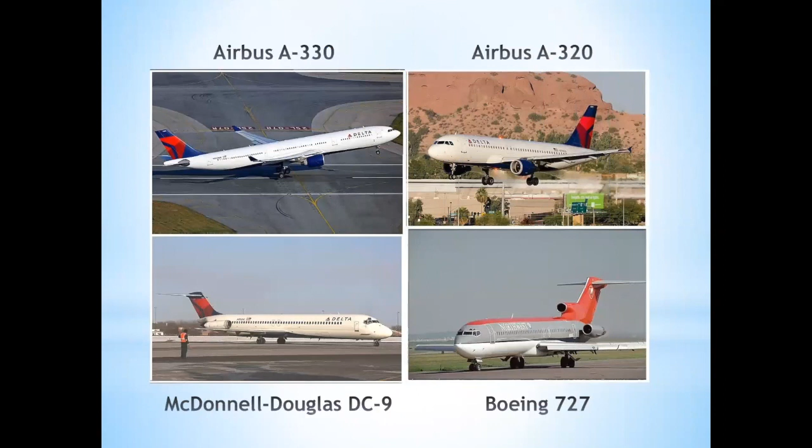And by the way, just a little bit more on my background, I also do practice law. And so I guess between being an airline pilot, a New Yorker, and an attorney, I have something anybody could hate, right?

These are some of the other airplanes I flew when I was over there. I did teach on the DC-9 - I was a line check airman and instructor on that airplane. I did fly the Airbuses, the baby buses we call the A320, and then the A330 as well, mostly over the ponds with that. And then you could see the bowling shoe paint job on the 727 when it was still Northwest Airlines.

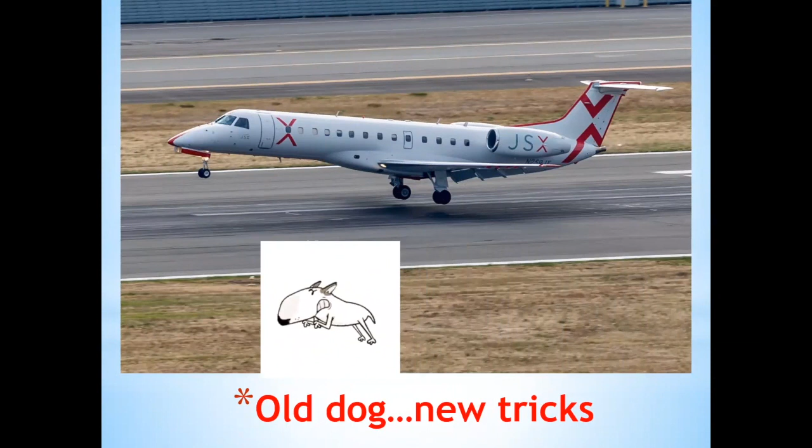Anyway, I really didn't want to give up commercial flying, as Mike mentioned. So I'm flying for what's called a scheduled, it's an air carrier scheduled charter. I thought I was done with my type ratings, but this was my 6th type rating, on this Embraer, which I'm flying now for JSX. You can see it's a pretty decent glass cockpit - not the latest technology, but it's a glass cockpit. It's a nice airplane to fly, kind of has a heavy feel like a bigger airplane, so it's kind of fun flying it. That's what I'm doing now.

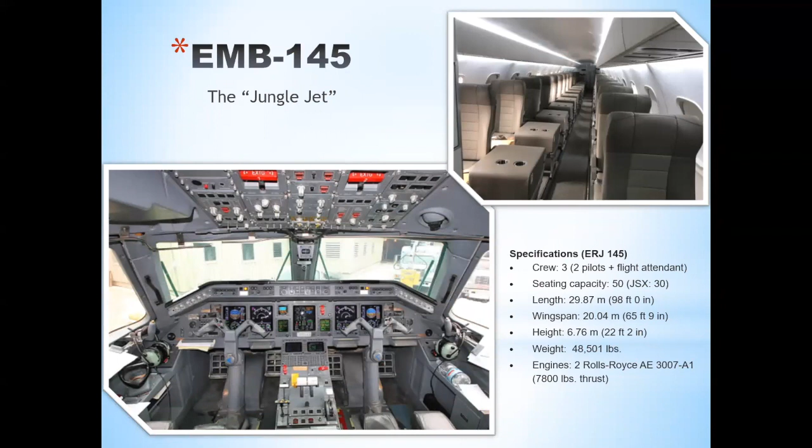People say there's a saying - I speak a little Mandarin - and people say that the symbol for change is both danger and opportunity in Chinese. That's actually not exactly accurate. Weiji is actually the pronunciation for it. Although that's not exactly accurate, I think the statement is accurate, that whenever there's a change, there's both a danger, but there's also an opportunity there, right?

So in our case, the opportunity with a glass cockpit is you have a lower workload, you have less fatigue, you have more economy of movement, you have new and enhanced approaches that you could do, like LPV approaches, that sort of thing, much more information. But on the other hand, you have to learn a new way to fly, a new way to scan your instruments, a new way to do those approaches, right? And you have to be careful about complacency, because along with a glass cockpit comes automation, and we'll talk a little bit about that later.

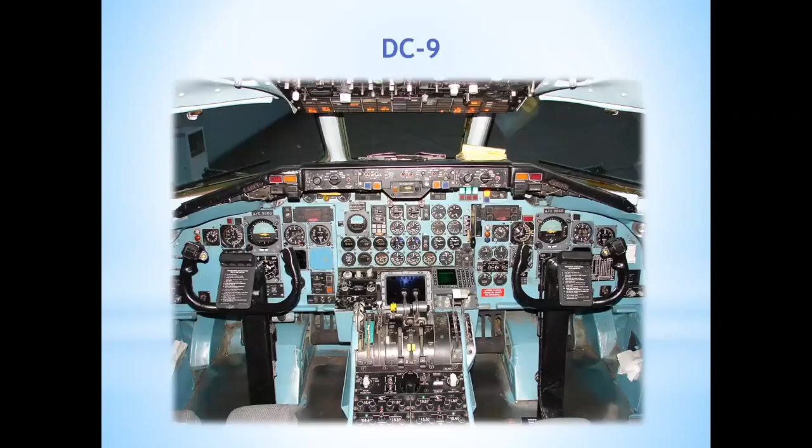Well, when I did my transition from analog to glass, this is what I was flying. My first analog to glass, I was flying the DC-9, which was the most archaic airliner at the time. And I ended up getting a bid to go to the Airbus A320, which was the most advanced aircraft of the time. Now you look at these two airplanes - flying this is very different than flying this, okay?

It was quite a transition, and I knew it would be, so I studied really, really hard to learn this before I ever got to class. Because I knew this was my first one and it really was all new to me, so I really wanted to learn it. It's a wonderful airplane, but it's very different. It doesn't fly like this flies, right?

Here's what you have to realize: you go through a learning curve when you transition from analog to glass. Let's face it, most airplanes we fly are transitioning from analog to glass. It used to be that airlines had much more advanced avionics than GA airplanes, but that's no longer true—you can buy really nice stuff for GA airplanes these days, and in many cases it's better than what the airlines are flying. But you do go through this learning curve. First you think, oh yeah, glass looks great. Then you realize, yikes, this isn't easy, I don't really know what I'm doing. Then you think you start to get it, but you realize what you don't know, so you think, yikes, I've got a lot more to learn. Then it starts to make sense, and finally, like anything, you master it and it's wonderful. It does take that learning curve to go through.

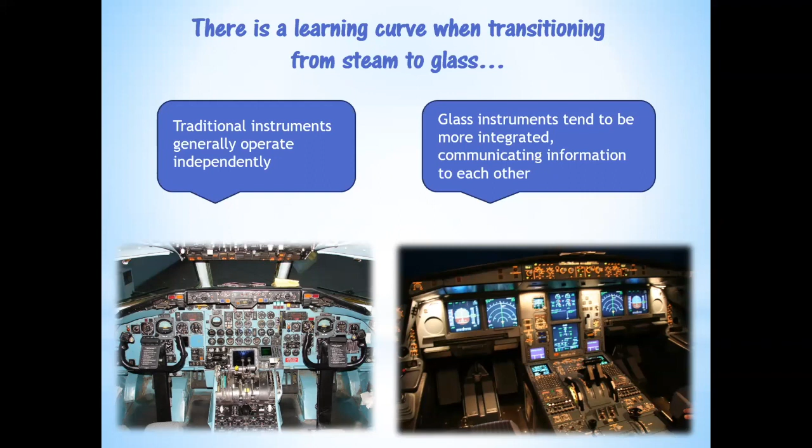One thing to realize when transitioning from steam—as we call traditional instruments—to glass, is that traditional instruments tend to operate autonomously. Each one does its own independent thing, and you look at it and get the information from it, and that's it. But in a glass airplane, the components all tend to be looking at each other and getting information from each other. So there's a lot more interaction between the components and systems than on a traditional airplane. You have to get that concept down.

Let's say one of these is your airplane. And then you go and get glass. Is it the same airplane to fly? When you walk up to it from the outside, it's the same airplane, right? But is it really the same airplane to fly anymore? I submit to you that it's not. Let's say this was your cockpit, and somebody was wonderful enough while you were sleeping to sneak out to the airport and plop $120,000 down and overnight manage to get your cockpit to transition to this. Then you come up to your airplane and think, yikes, somebody messed with my airplane. Would you be able to just hop in and fly away the same way you did the day before? Obviously the answer is no. There's something to learn now.

So that's what we're going to talk about.

Two questions airline pilots always ask when flying glass airplanes: one is, why are these fingerprints on the glass? It amazes me—I get into the 737 and there are fingerprints all over the screens. These are not touch screens, there's no reason to touch these, but for some reason there's fingerprints. I'm always taking off, you know. If I wanted to look at fingerprints, I would have joined the FBI.

But anyway, the next thing they're always asking is, what's it doing now? Everybody goes through that transition when they go to glass—like, what's this airplane doing now? It's kind of doing its own thing. So today, hopefully, we're going to look at ways to avoid that 'what's it doing now' feeling.

With the traditional six-pack, you always want to treat your attitude indicator as the hub—no matter what else you do, the next thing you do is look at your attitude indicator. When you do that, you never get that far out of whack. You're used to looking at the other instruments and comparing them to your attitude to get what you want out of them. The same thing applies with glass—you still need to use the attitude indicator as your primary hub when looking at the other instruments. But there's a bit of a difference when you look at an airspeed indicator versus the round dials, as we call them.

You're sort of used to seeing that needle in a given place. Well, that doesn't happen now with the digital instrument. It's more of a tape, chances are. And so you're now looking at a numerical value, not a place where that needle is necessarily, right?

Okay, same thing with the altitude, right? If you're flying IFR, pretty much those needles are pointing up. If you're flying VFR, one of them's pointing up and one of them's pointing down. So it's kind of a visual thing you could look at. But in the glass airplane, it's a numerical value. It's digital.

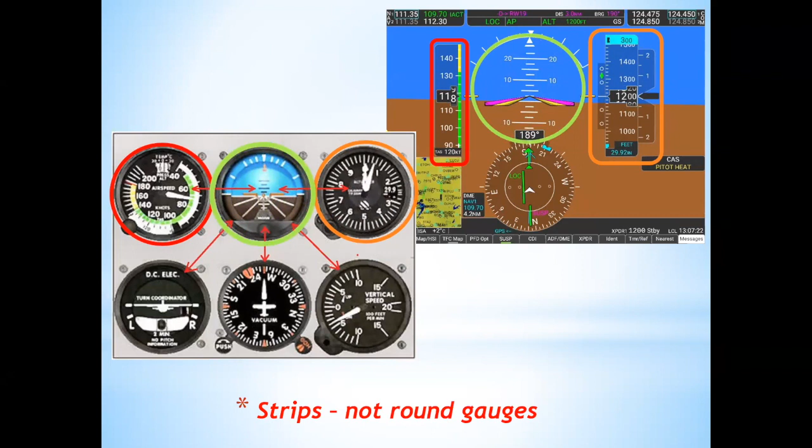And the same thing now with your attitude, you do still look at it in a traditional way, but sometimes you have even more of a horizon to look at, and that's kind of a big help. So you do still have that kind of information to look at.

I'm going to be going through some things quickly and then later on something slowly, because I want to emphasize those. But again, we're looking at digital versus analog, and you're looking at how your scan tends to change. And it takes a few months to get used to that.

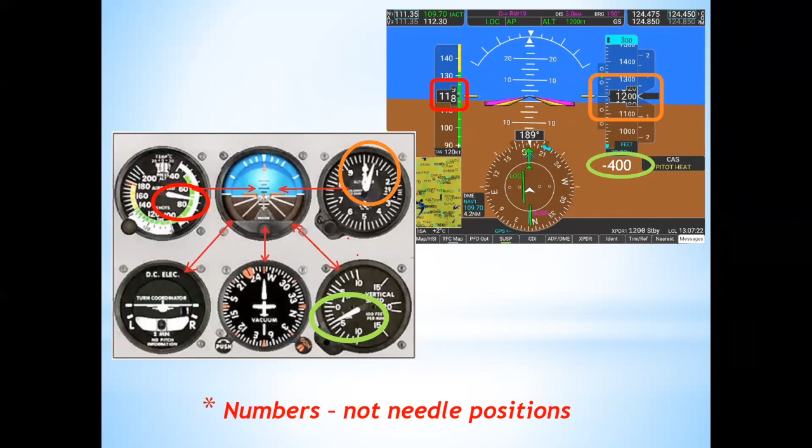Look at this, especially a vertical speed indicator. You're used to that needle up or down, meaning I'm going up or I'm going down. Whereas now I'm looking at a negative 400 to see that 400 foot per minute descent. So it's a different way to look at it.

I met a guy who got a Garmin and he said, hey, this is great because being that it's a screen, you could program it for round dials if you want to. So if you want to keep it traditional instruments, you can do that. But I'll say this: you could put off-road tires on a Ferrari, but should you? So I would suggest that if you're going to the new modern instruments, go to the new modern instruments.

Yes, it'll take you a little bit of a transition, but enjoy the new experience of it. And in the long run, I think you're better off looking at the new digital instruments the way they're meant to be. But the other side of that coin is, it's information overload in a lot of cases.

I notice a lot of pilots when they go to glass, boy, there's so much there. What do you look at, right? And it's interesting how as you get more comfortable with looking at the glass, your mind filters out what you don't really need at the moment.

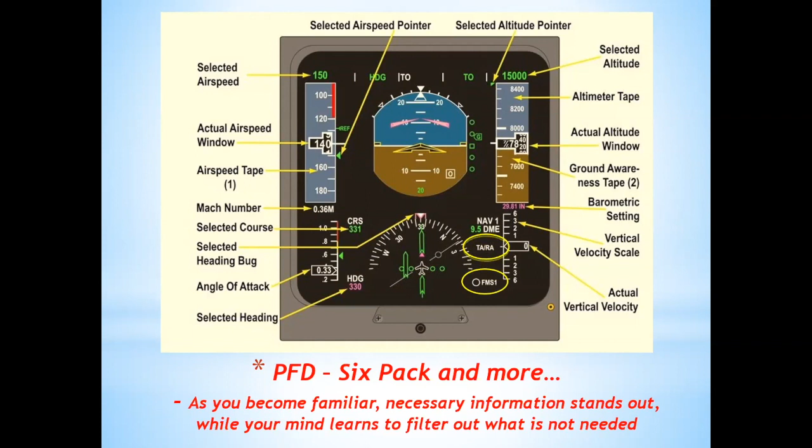So for instance, if you're not really using your flight management system at the moment, you sort of filter it out. If you don't have traffic that's a factor at this moment, your traffic advisories and resolution advisories, which you may have or may not have, are not necessarily something you need to look at. So you learn to sort of filter things out as you need them.

Another thing that's a little bit of an oddity, we're used to stepping on the ball for coordinated flight. And with a digital instrument, they may have this little guy up here. Sometimes they say you sort of put the sail over the sailboat, or you sort of step on the brick, so you're using that to make that coordinated flight instead of a ball sometimes. It depends on the symbology.

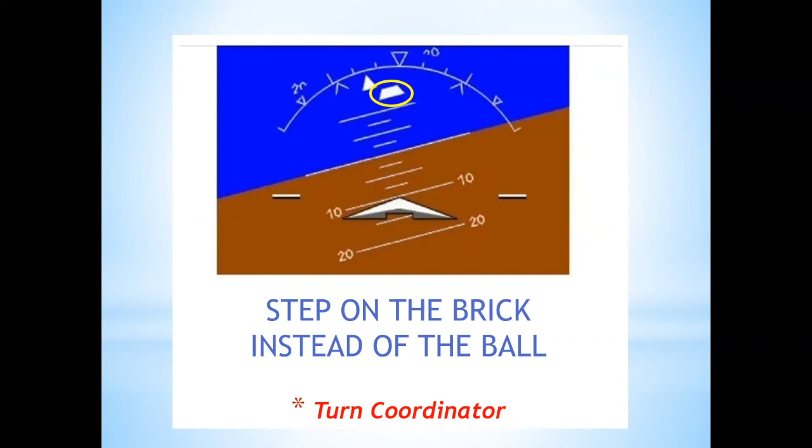I have to say that sometimes I find this a little bit subtle, a little bit tougher to look at. You get used to it, but it is a little bit more subtle. This is what I have in my airplane, and you could see it's digitally produced, but nevertheless it's a little ball at the bottom, kind of like you're used to looking at. So in this case, it's a bit more of a traditional view of your turn coordinator.

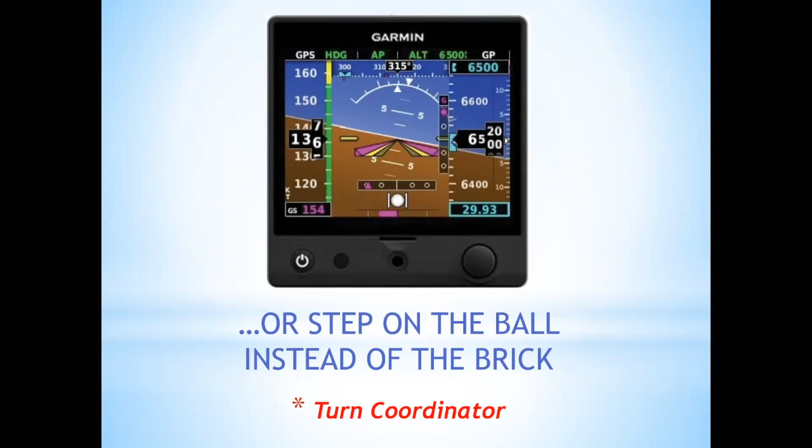Right, so that's good information to have, right? Okay, and then of course we obviously have our maps and things like that, or our charts, I should say, and that's kind of a bird's eye view. But I'm not going to get heavy into that because we already are looking at those things a lot.

Many of us already have GPSs. Even if you don't, if you look at a chart, you're basically looking at a paper version of a bird's eye view. So that's not what I'm really going to be talking about today as much as I am about the symbology and how to use the glass to navigate, that sort of thing. But we do have the benefits, of course, of that sort of technology, and it's wonderful. Right? Follow that magenta line, right? And it's really a very nice way to fly.

I just came back from Santa Maria a couple of days ago, Solvang. Mike Jesh referred to that earlier in talking about interesting places to fly. And that is a great place to fly. So it was really good. But I followed that magenta line. I was able to get direct, do that sort of thing. So it's got a lot of nice features, obviously. But that's not what we're focusing on today.

Very important, and you'll see later on how that could be critical.

Instrument setup. Now, we talked about the color of these needles. What's wrong with this picture? If you look, there's your green localizer needles, meaning you're getting information from the good green earth coming up. But what's happening on your GPS? You're tracking a GPS signal, magenta, and they don't match. You see that? So why would something like this happen?

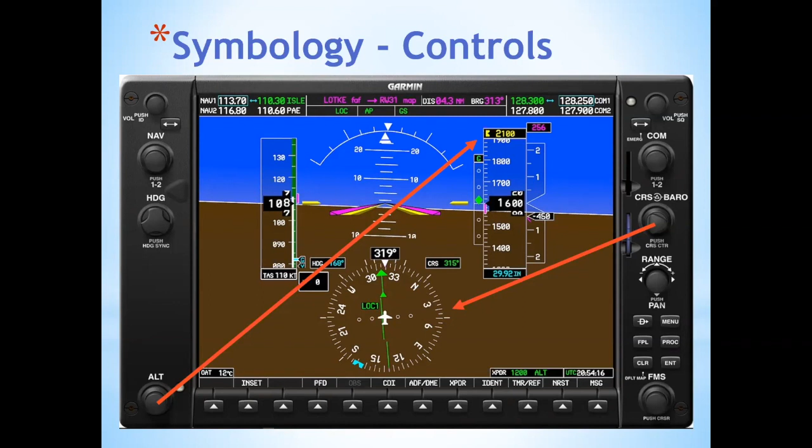This is part of your pre-flight setup. When you do your pre-flight, check your flight controls, and get into your avionics, this is part of your setup. This is now a G1000. I mention this because whatever you get used to becomes the norm, but it seems to me sort of an illogical setup. Here you have your altitude knob on the lower left. Where is altitude normally seen? On the upper right. Seems to me the knob should be up there, but that's not where it is on a G1000. And we have a lot of our lateral information off on the left side, but where's our course indicator or course knob? It's on the right. So it just seems like they were kind of illogically set up.

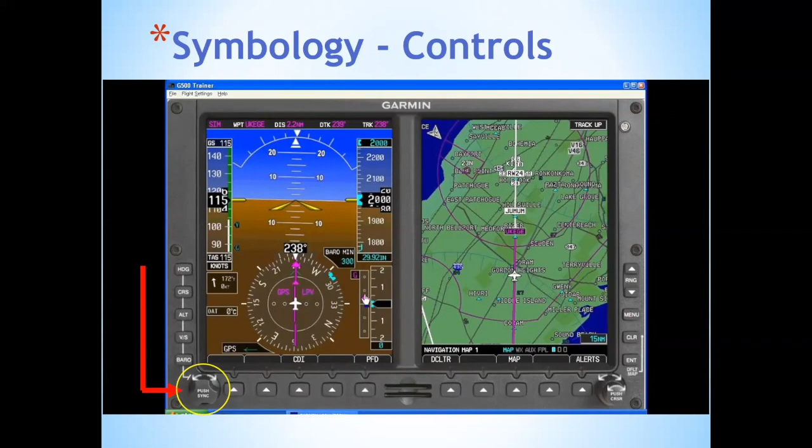I kind of like the G500 now because what that has is a knob at the bottom, and you look at the things above it: heading, course, altitude, vertical speed, baro. They all have a line going to it. So basically, whatever button you press means that knob affects that particular thing. Very logical, so I kind of like that a lot. But the reality is, whatever you get used to using becomes the norm to you. Still, I find this to be a little bit more of a logical setup.

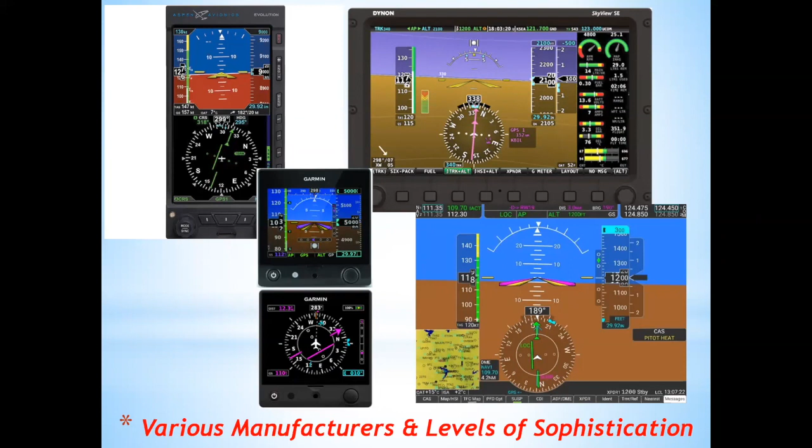Again, you have to get familiar with your particular manufacturer. There's Dynon, there's Aspen, there's Garmin, right? There's all kinds of different avionics that you need to get used to the symbology. I like to, when I'm just kind of vegging out watching TV, pick up the book again and review things. And invariably there's some little things - oh yeah, that's right, forgot about that little nuance. So it's good to do that.

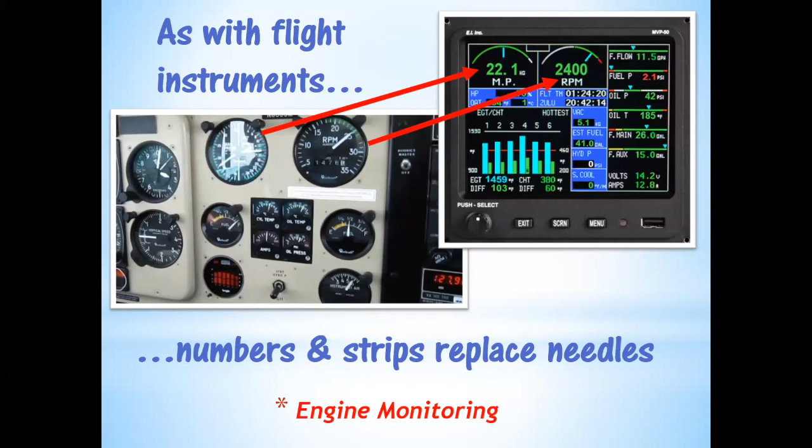Now, keep in mind also that you could get digital engine instruments. So you could have the traditional analog instruments, but if you go to a digital readout, that changes things too, because you're used to these needles in a given place. You do have these simulated needles on this one as well, but you're more looking at a digital readout. So it's a different type of scan that you have to get used to. But again, once you get used to it, it's quite nice and superior to this - it really gives you detailed information. And of course you can modify a lot of these screens to really make them the way you want them to be. But keep in mind, you do have that to deal with as a new way to look at your engine instruments.

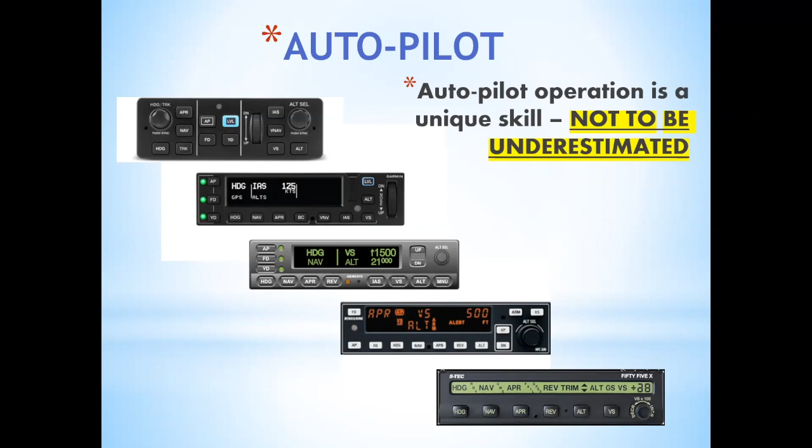I'm going to be getting kind of heavily into this part, which is why I did the first part a little fast. But one thing you really need to get used to is your autopilot. I once had somebody say to me, yeah, you airline pilots, you just click it on, push a button and watch the airplane fly. Oh really? So I guess that means you can do what I do, right? You could just go in that airplane, press the button and watch it fly. Well, no, I guess maybe there's a little more to it. And there is, because if you don't know how to use your autopilot - and that's a skill of its own - that's a 'what's it doing now' thing, because the autopilot may be doing something you don't want the airplane to do. You really need to understand how your autopilot works. That's a critical thing, and there are some definitely nasty things that could happen if you don't understand that.

Keep in mind, don't forget, when all else fails, shut off the stuff and fly the airplane. You all know how to fly stick and rudder, so when it comes down to it, if it's not doing what you want it to do, you could always shut it off and fly it. Remember, the autopilot - what it indicates - is rumor, and what's on your flight mode annunciator is fact. That's a way to keep you out of trouble, understanding what the airplane understands itself to be, what it's going to be doing.

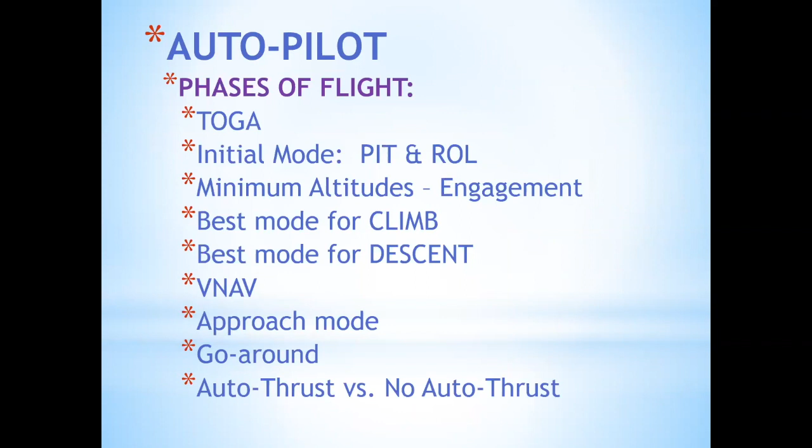All right, so let's talk a little bit about the different phases of flight using that automation and the glass cockpit. Initially there's the takeoff go-around, that's the TOGA button. You'd hit that and your flight directors would zip up to your normal rotation attitude. But it varies with the autopilot, generally speaking an autopilot is likely to default to the roll mode and the pitch mode, because it doesn't know what you want yet.

So the roll mode in a takeoff is normally going to be wings level. The pitch mode is going to be what it expects you to rotate to for a normal takeoff. In my airplane, at least my GA airplane, that's about 10 degrees. So that flight director comes up to 10 and expects you to bring your wings up and tuck them nicely into that flight director. That's the mode the autopilot's initially going to be in.

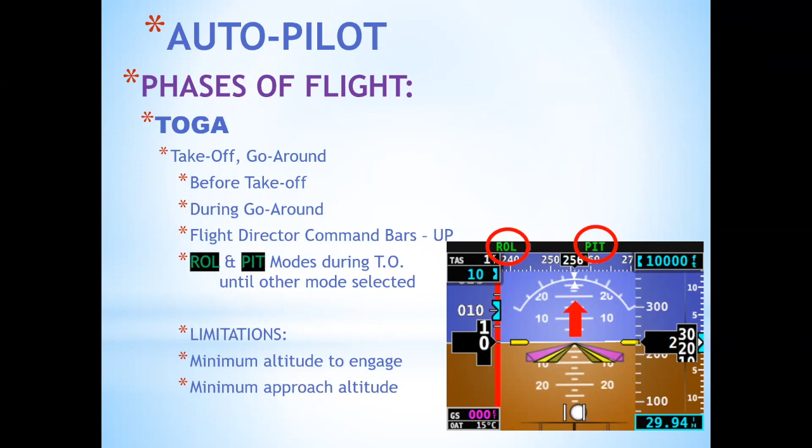But chances are you're going to be going on a heading, possibly runway heading, possibly an assigned heading, or possibly cleared directly to a fix. So you can switch that to whatever roll mode you want it to be, indicated airspeed or vertical speed, we'll talk about that, and the pitch to whatever you want it to be as well. Just understand, this is what it is doing, this is what it thinks it should be doing, what it defaults to.

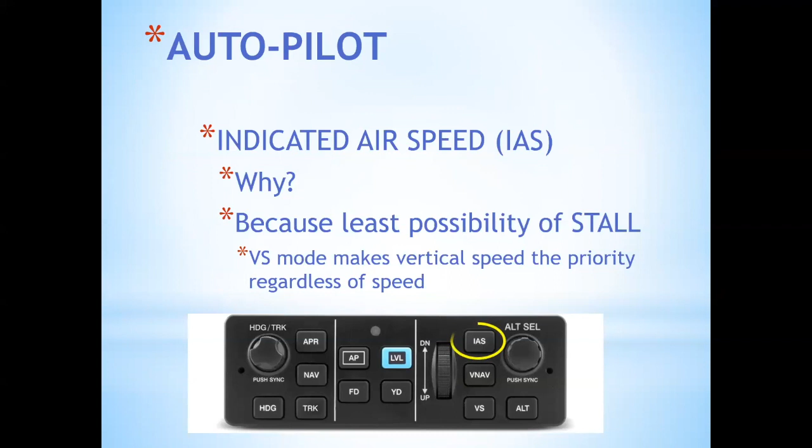This is technique only, but in my opinion, one of the best ways to climb out with an autopilot is with the airspeed as the primary factor there. Why is that? Well, you're pitching up.

And if you put the autopilot in a vertical speed mode, that's the autopilot saying, okay, you said your top priority is this vertical speed you set, and no matter what, I'm going to maintain this vertical speed. Well, what could happen? If you're not paying attention and you picked a high vertical speed, you could potentially stall the airplane.

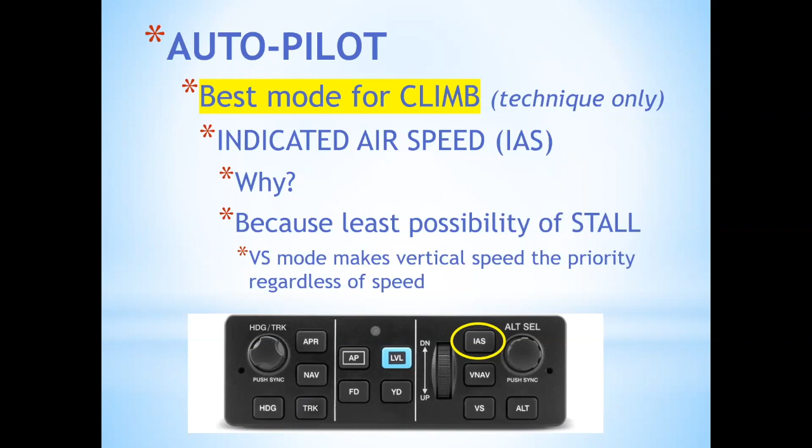So I like the idea of climbing out in an indicated airspeed mode. It also sets me up with a speed that I like that keeps my engine cool, that sort of thing. But I like the idea that if I set an indicated airspeed, now if I'm kind of busy doing something and I momentarily don't look at my gauges, I'm not going to get far out of whack, I'm not going to stall the airplane. So this is, I think, a good mode for climbing out, indicated airspeed.

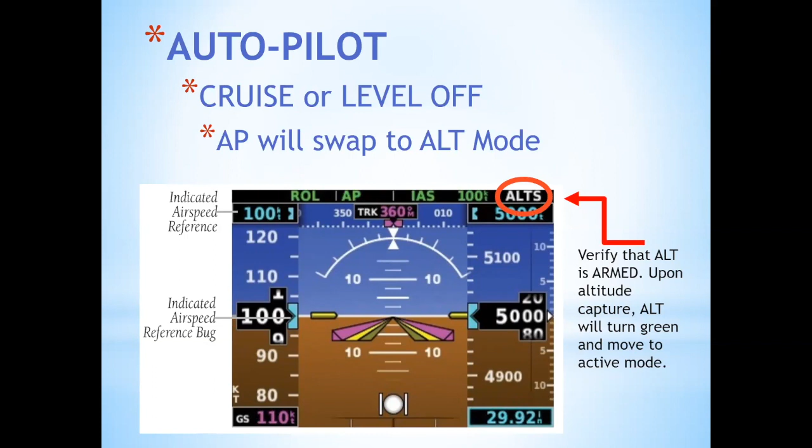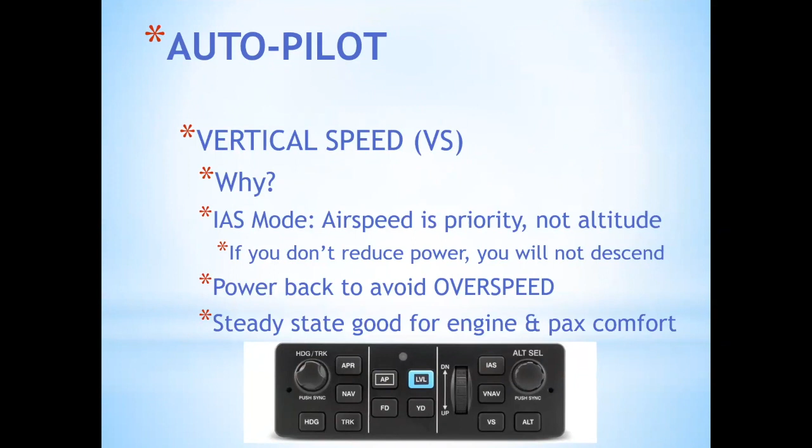So alt, indicated airspeed goes away, alt goes green, and you're level at 5,000. Again, a beautiful thing. Okay, so now let's look at, we're now descending. So what would I say is potentially the best mode to descend in? Again, this is technique only, but in my opinion, vertical speed. Because now you want to maintain a given steady descent. It's good for your engine, it's good for your passengers, it's good that ATC predicts what you're doing. So it's nice to set up a vertical speed, you're going to set your autopilot for a nice vertical speed that works well for you.

And now keep in mind, you've now given priority to your autopilot that vertical speed is the priority.

If you do not pull your power back, it's going to maintain that, and you're probably going to be zipping your airspeed up into the yellow. So you have to keep that in mind. But now you can ease back, and in my airplane, every 1 inch manifold pressure is roughly 100 feet per minute descent. You can wind that back nicely and predict it, so you can fly by the numbers. I like vertical speed for descent mode, but again, this is technique only.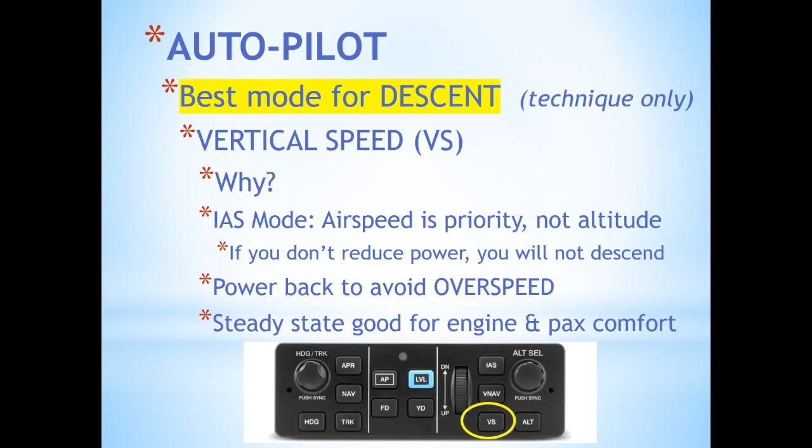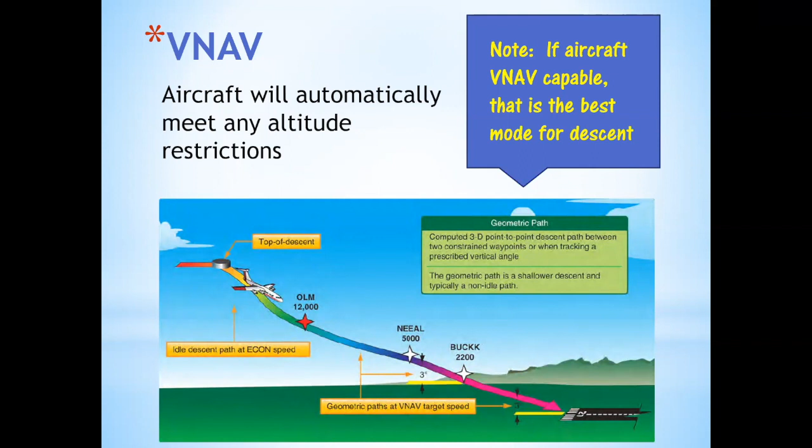Now, if you have an airplane that's more sophisticated with VNAV capability, that's a whole subject - could easily do one hour on VNAV alone. But if you have that, it's probably your best mode for descent, especially because in VNAV mode it'll make crossing restrictions for you. In the 737, many times east of Palm Springs, we'd get a descent clearance, even cleared for the approach, and set it all the way down to 2,000 or 1,800 feet for our initial approach altitude into LAX. The airplane will step down, make all the crossing restrictions, even speed restrictions, and fly the approach very nicely. Beautiful thing. But if you don't have VNAV capability, and most GA airplanes won't, vertical speed works real well.

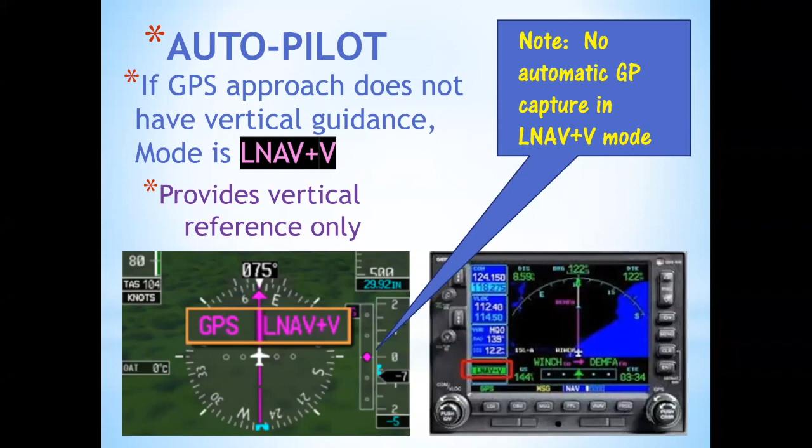All right, let's look at this. Keep in mind that if you're doing a GPS approach that is not an LPV approach, you're providing the vertical descent. You'll get glide path information, but this is not a legal glide slope or glide path indicator to follow, and your autopilot will not do it for you - you have to do it. LNAV plus V is the indication of that. This gives you great guidance for making a nice, steady descent, but you're the one providing the vertical guidance. You're tipping it over, and we know in our airplanes, back at approach speed, about 500 feet per minute usually works real nice. So you set it up and fine tune that vertical speed to pop the top of those crossing restrictions nicely.

Let's look at this. It's very important that in the airlines, we're required to match the heading bug with where we're going. Why do you want to do that?

You want to be sure you understand what your airplane's doing and what mode you're in. If you match the heading bug to where you're going, constantly hitting that and slewing it, all you have to do is hit the heading bug, then when they give you the heading, when you go into heading mode, nothing happens - the airplane flies straight ahead. Now you can turn to the heading they assigned, and you're going to go left, not right. So it's very important to line up your heading bug with where you're going. Constantly match it up. Anytime you change heading, change your heading bug to where you're going - it'll keep you out of trouble.

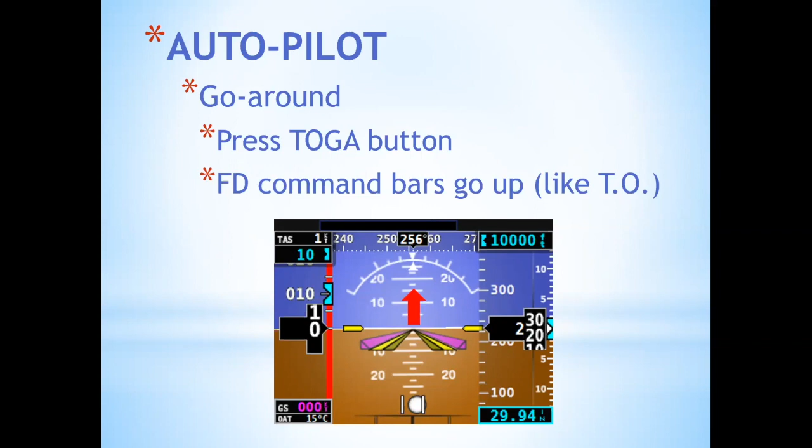You want to keep that in mind, that with these instruments, they're all interfacing with each other. It's not like independent instruments where each one is doing its own independent thing. They are all talking to each other, and it's very important you get that interface going.

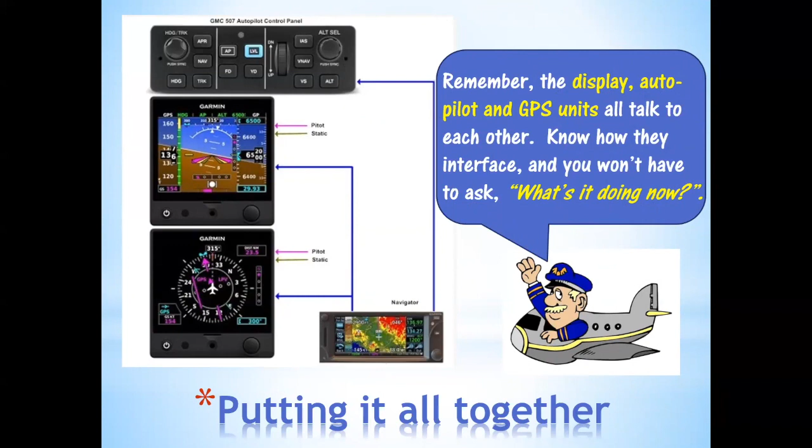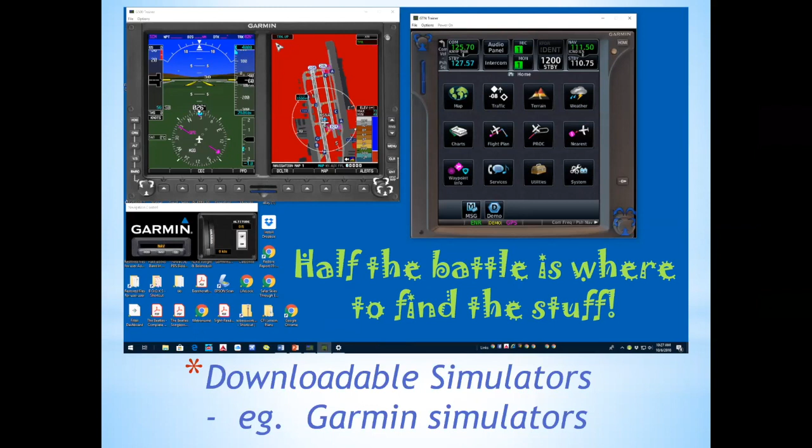A lot of the battle with this is just knowing where to find things. You can download simulators, for instance, the Garmin simulator for the GPS, but it still does relate to your glass navigation. You can get a lot of information and practice while you're sitting home, and you don't have to worry about traffic and ATC and all the other distractions that go with flying the airplane, as the Kings pointed out so well. Being an airline guy, I'm big on simulators. Simulators are terrific, and even these simple home ones do a real nice job.

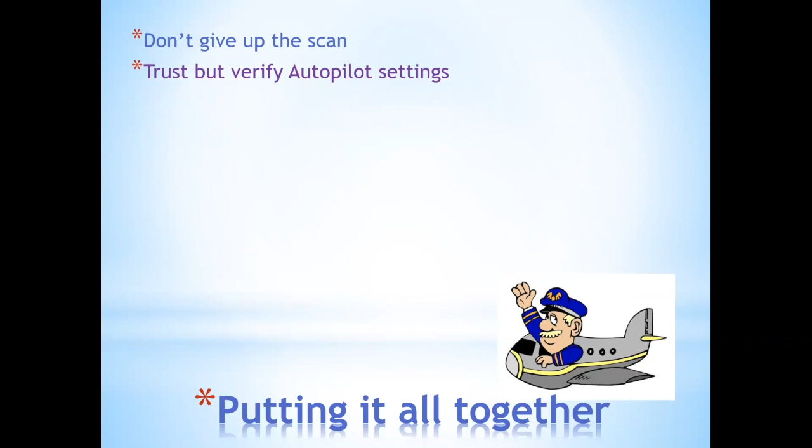Trust but verify the autopilot. They usually do the right thing, but that doesn't mean they always do the right thing. So again, the autopilot is rumor, what the FMA says is fact. That's a critical part of your new scan, constantly monitoring what the flight mode annunciator is saying.

Get used to the new scan before getting into heavy IFR. It's the same airplane on the outside, but on the inside, it's a whole new airplane. So I would definitely start shooting approaches and doing things in VFR conditions and get really comfortable with your instruments before you start biting off IFR.

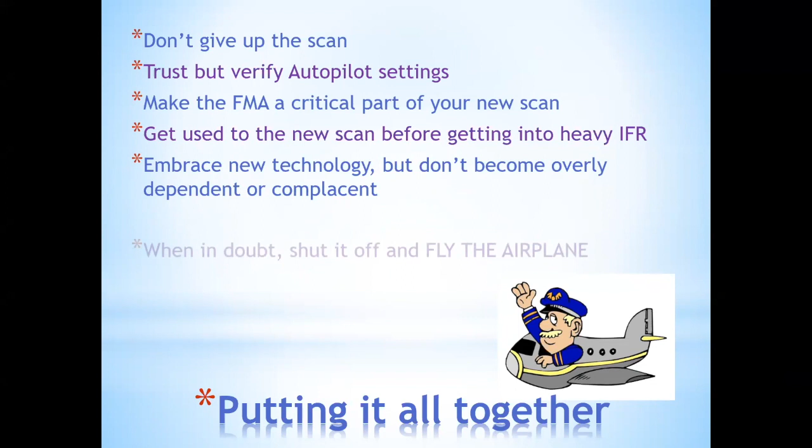Definitely embrace the new technology, but don't become overly dependent on it. Ultimately, if it's not doing what you want it to do, or if you're not sure how to get it to do it, shut it off and just fly the airplane. I'd say almost all of us learned on airplanes that never had autopilots. When in doubt, shut it off, fly the airplane.

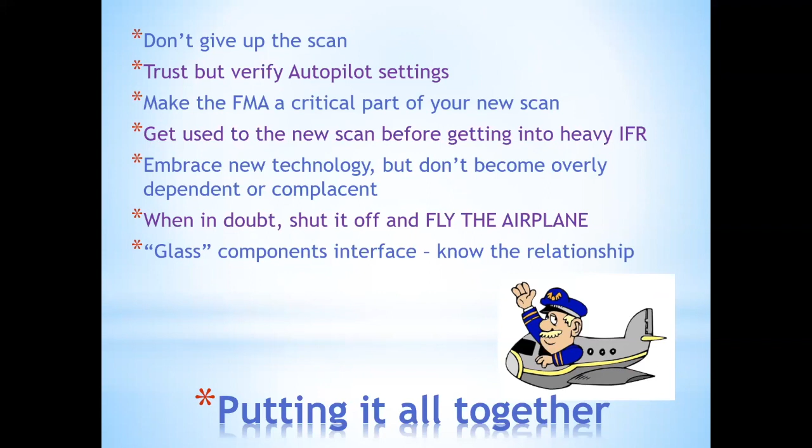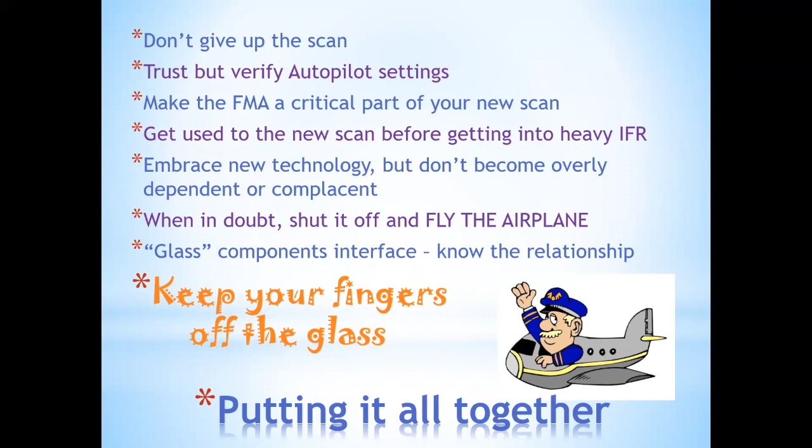Glass cockpits often interface, so know the relationship between the instruments. And please, keep your fingers off the glass if you don't have a touch screen. So those are the basics, I would say, with getting into glass. If you have any thoughts, I'd sure like to hear what anybody has to say or any experiences anybody has had flying glass. So with that, I'll open it up to the forum, Mike.

Mike, you need to unmute yourself. I still don't hear you for some reason, Mike. I pushed it twice, it's still not working. Could we see you, please, Gary? Gary, your camera apparently is not working now. It was working earlier, but not now. I'll stop and let me go in and do that. Meanwhile, I got a question for you. Let me turn this off here.

What's the difference between a new pilot and an old pilot? The new pilot says, 'What's it doing now?' And the old pilot says, 'Look, it's doing it again.'

When we got to the Airbus, everybody said it takes about 6 months to really feel comfortable in that airplane, and that was really accurate, it really took that long. When I transitioned to the glass panels, actually quite a long time ago now, I'm almost embarrassed to say, but yeah, it took several months to get really comfortable.

One point I'll make is if you change your airplane or go buy a new airplane that's got this glass panel, don't go out and jump in and do an ILS to 200 feet and a half a mile right away. You need to practice with it.